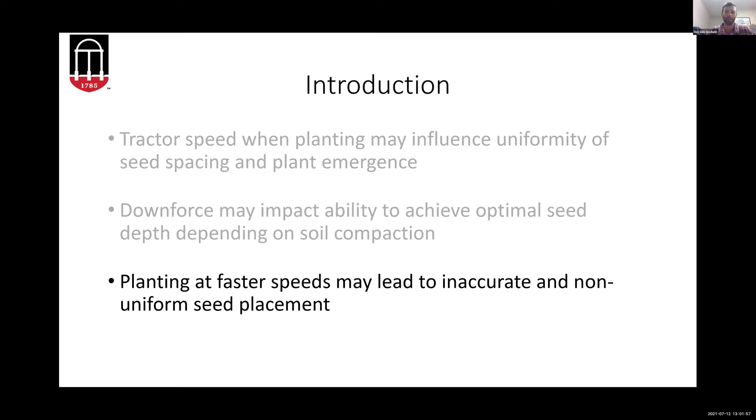This study was conducted to determine the optimal tractor speed and downforce pressure to achieve an optimum seed spacing, a normalized difference vegetative index, which from here on out we'll refer to as NDVI, best plant stand, and highest yield.

So I've got two videos right here that we took at planting. I'll go ahead and play the one on the left. That's going to be our slow speed. That's in real time, and you can see that the planter, especially the hoppers on the planting unit, they seem pretty level and don't seem to be bouncing.

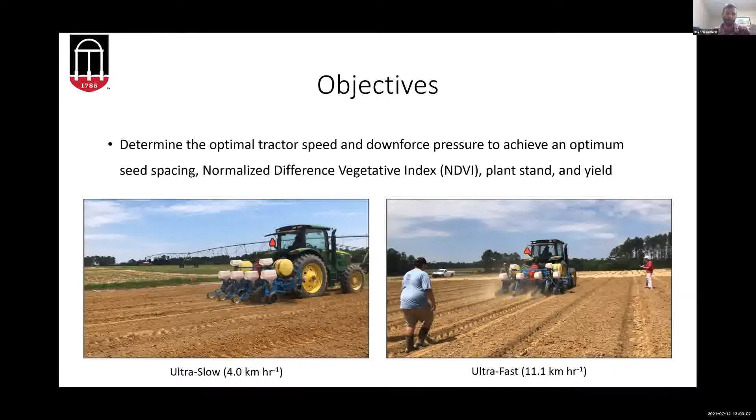And now I'll play this video on the right. This is our faster planting speed. Two things you're going to notice: naturally the tractor is moving at a much higher rate of speed. And also the hoppers at the back of the planter almost seem to be bouncing a little bit at this high speed. So if you're planting and your hoppers are bouncing up and down, they may bounce 2-3 centimeters, and that could potentially affect the depth that you have it set to.

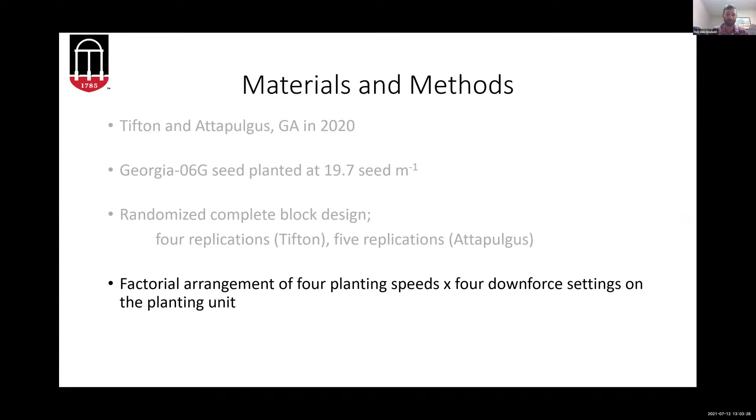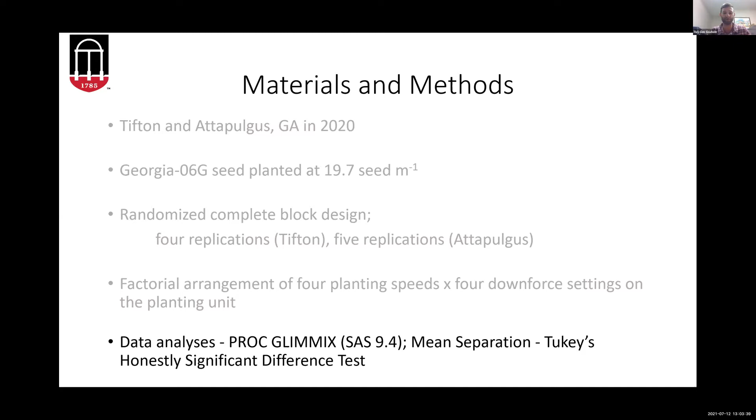These trials were conducted in Tifton and Attapulgus, Georgia in 2020. We used industry standard Georgia 06G seed. We had a randomized complete block experimental design with a factorial arrangement of 4 planting speeds and 4 downforce settings. And data analysis was performed using PROC GLIMMIX in SAS version 9.4 with Tukey's honestly significant difference test for our mean separation.

4 tractor speeds were used at planting. We considered those ultra slow, which was 4.0, medium slow, which was 6.4, medium fast, which was 8.6, and finally ultra fast, which was 11.1 kilometers per hour.

And we also used 4 different downforce settings at planting. If you can see this picture right here in the middle, inside the yellow circle, that's how we were able to manipulate our downforce setting, where this first notch here was 445 newtons. Then you can just pull that pin and slide it down to this notch here. It'd be 890 newtons, and on to the third notch, which would be 1335 newtons. And it's stuck behind this collar, and you can't see it here, but there is another notch, and that was 1780 newtons, which was our greatest amount of force that we used in this study.

Emergence counts were conducted at 7, 14, and 21 days after planting. Seed spacing measurements were recorded over 300 centimeters of plot row, and that's what this picture on the right here is. We were able to take off one of the press wheels on one of the outside sample rows, which prevented the furrow from being caved in with soil, so we were able to actually measure the distance between each seed. And we used a Crop Circle active light sensor manufactured by Holland Scientific to measure NDVI, and that's what's going on in this picture right here in the middle.

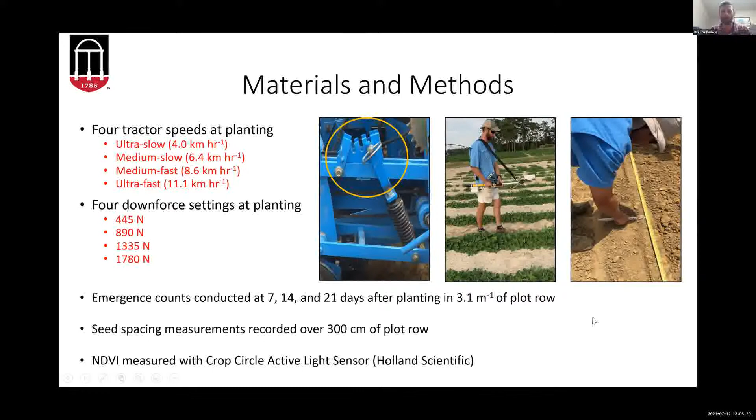Here I have two more videos. I'll go ahead and play these side by side. The first thing I want to point out is these were both in the same slow motion rate, but just look at the plate on the right, at how much faster it's spinning than the one on the left, just as a result of the faster speed.

And what that may cause is the vacuum on the planter to not be able to keep up with how fast that plate's spinning. And when that's the case, it's going to lead to skips. And if you look right here where this video ends, there are seven total holes right here, and there are only two seed on that plate. Just for this particular screenshot, or where it stopped, there would be seven holes and only two seed on there. So basically for every seven seed that you are expecting to be putting out, it's only putting two out at that speed.

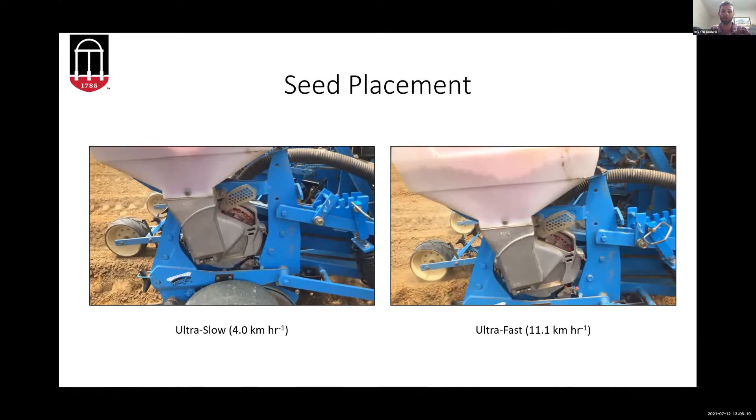Looking at some pictures that we took of our seed placement. These two pictures on the left side of the screen are from our slower planting speed. I just want to point out it seems to have good spacing uniformity. I don't notice any skips or doubles. Seems to have really good singulation. That just looks good at the slower planting speed.

But then these two pictures on the right, these are our faster planting speeds. And the third one, you can see I just put that yellow box up there, and inside there, there's a large gap with only one seed in it. So we saw a lot of these large gaps similar to that with that ultra fast speed.

But also inside these blue ovals right here and up here in the second picture, what we noticed was sometimes the seed plate was struggling to keep up, and sometimes it would catch up and it would just dump out two or three seed right there, really close to each other. Sometimes, like these examples, on top of each other.

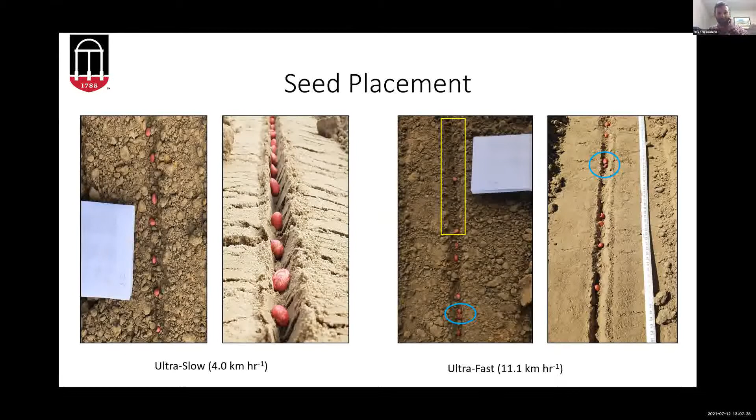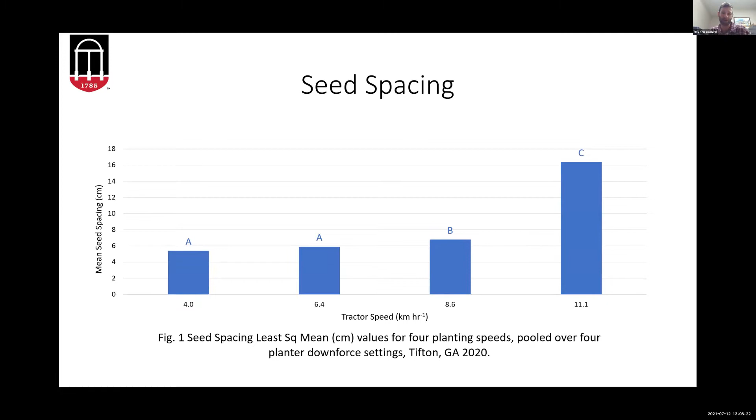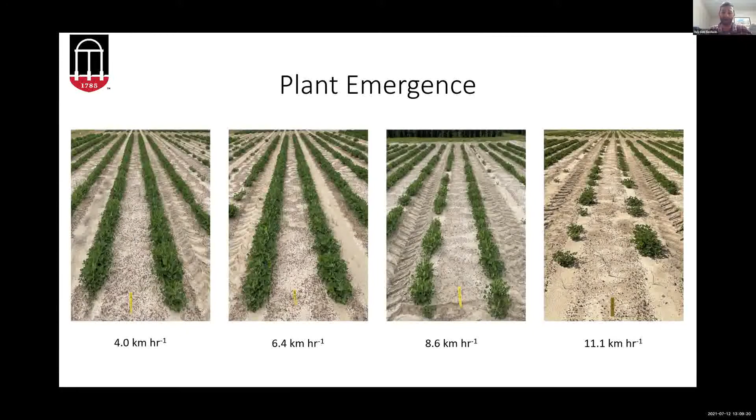And one thing I want to point out while we're on that subject is all this bare ground that you are seeing here, especially early in the season, is just going to promote and lure in thrips, who are attracted to the bare ground, and you're going to open the door for greater incidences of tomato spotted wilt virus and also potentially weed escapes with that amount of bare ground.

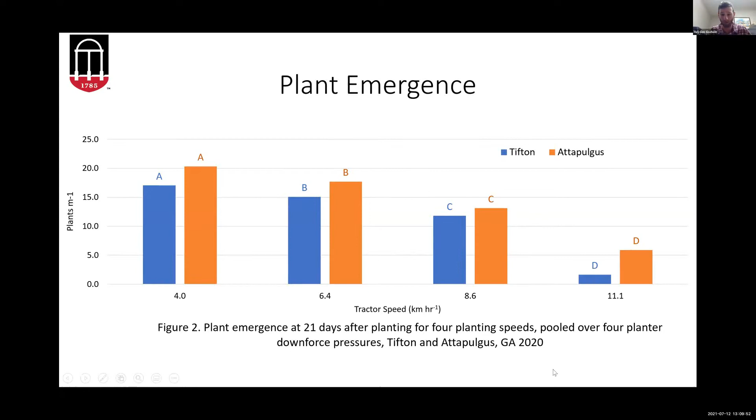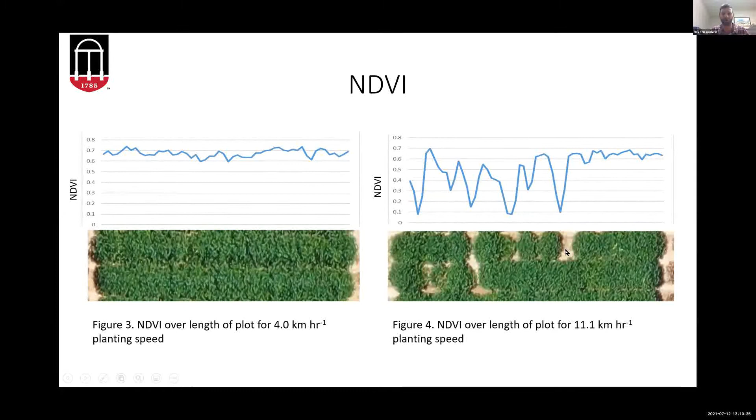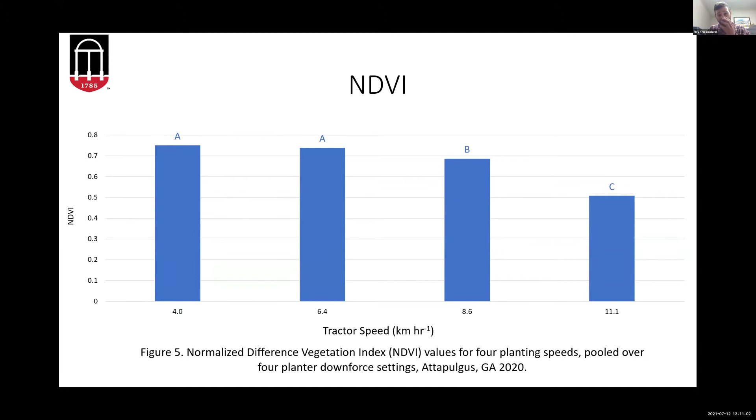So that'll help to visualize where this next data set is coming from. So the NDVI was very similar for our ultra slow and medium slow planting speed. And as we moved up to our 8.6 or our medium fast planting speed, we saw a decrease in NDVI. And as we moved on to our ultra fast, we saw a significant decrease, very extreme decrease in NDVI.

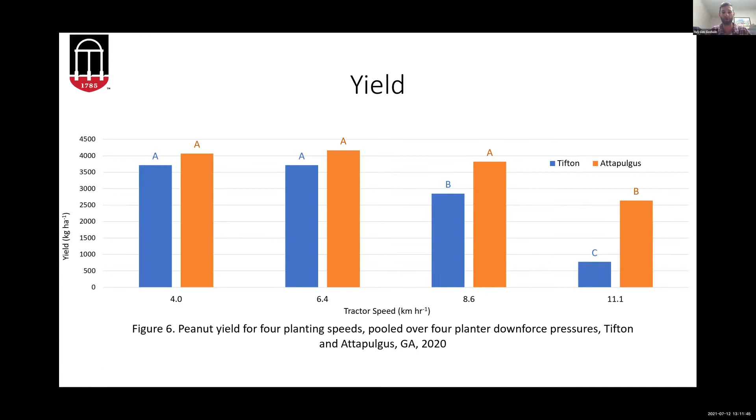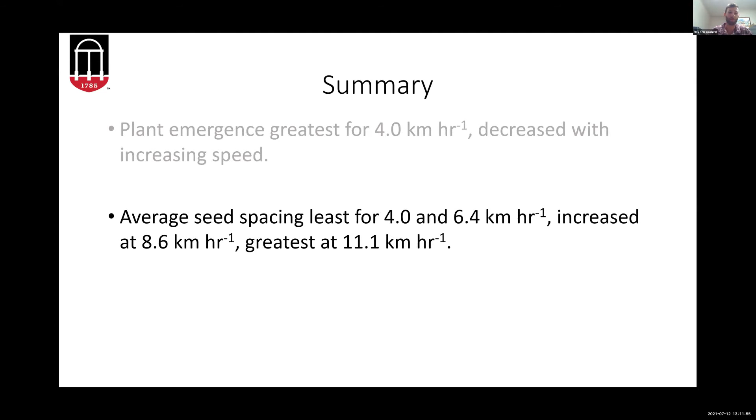And for Attapulgus, yield actually maintained all the way up to the 8.6 kilometer per hour speed before again a significant drop off at the 11.1 mark. So moving into summary, plant emergence was greatest for the 4.0 speed and decreased with each increase in planting speed. Average seed spacing was least, which in this case was a good thing, for our two slower speeds, and increased at the 8.6 and was greatest at the 11.1 mark.

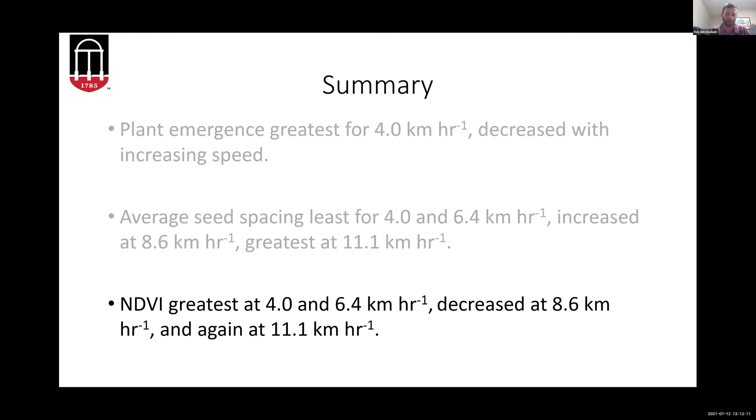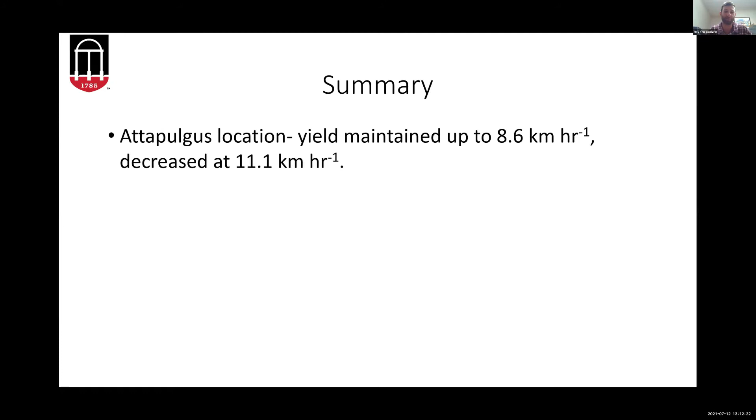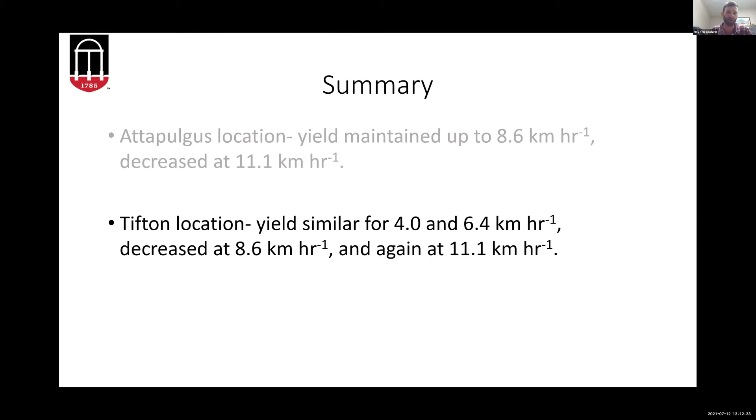NDVI was greatest at 4 and 6.4 kilometer per hour speed, and again decreased at our two faster speeds and was lowest at 11.1. Attapulgus location was able to maintain yield up to that medium fast planting speed, and then was lower at the 11.1. And Tifton location yield was similar for 4.0 and 6.4 speeds, and decreased at the 8.6 and was lowest at the fastest speed.

So just to kind of wrap all that together and sum it up, planting at speeds exceeding 6.4 kilometers per hour is not recommended based off of this study, and it can lead to a decrease in plant stand, NDVI, and most importantly, yield. And also, like I mentioned before, it could lead to a situation where a replant may be necessary, thus causing more time and more money than originally needed.

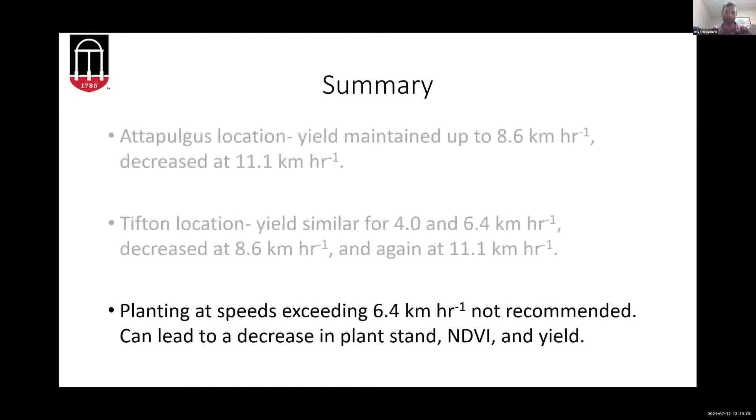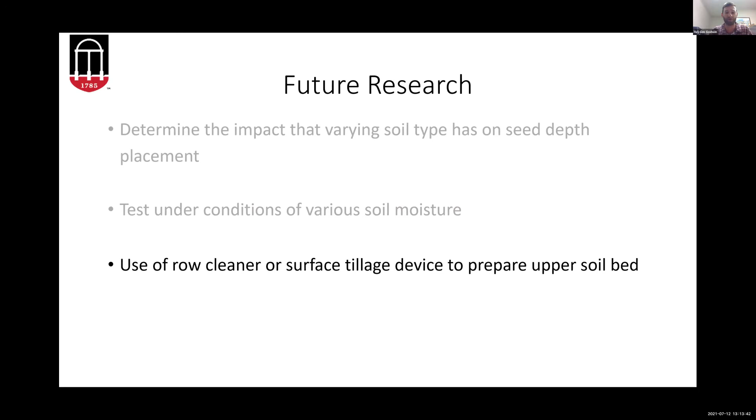Some ideas that this has given us for future research is to determine the impact that varying soil type has on seed depth placement. We didn't really pick up much of anything from the downforce with these results, but both of these locations are more of a loamy sand. So we're thinking that if we tested this in maybe a heavier soil type, that downforce may have a bigger role to play. And also downforce may come in more handy under various soil moisture. Maybe it would do better in drier or wetter soils. Also using a row cleaner or surface tillage device, and comparing strip tilling and conventional tillage with planting speed and downforce.